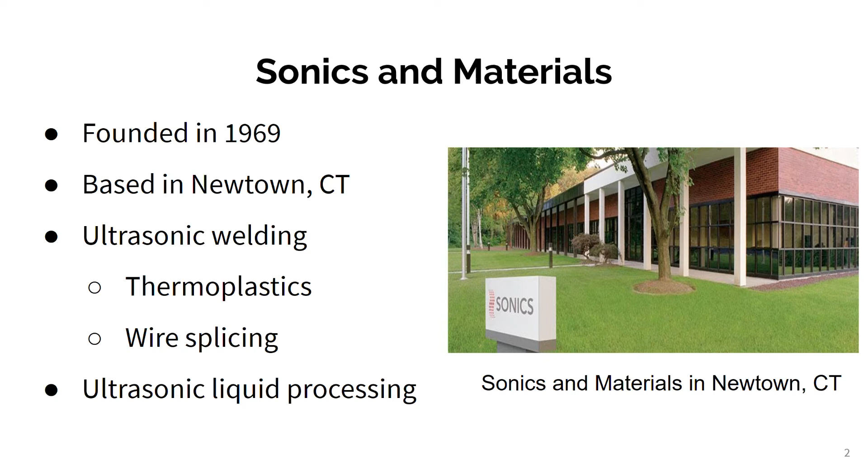And our project's objectives are to simplify the gather tool to improve its cost, manufacturability, and repeatability. So the requirements for this project include manufacturing and validating a working gather tool prototype to use this data to create a final gather tool recommendation. Additionally, we will provide possible anvil tool jamming issue solutions.

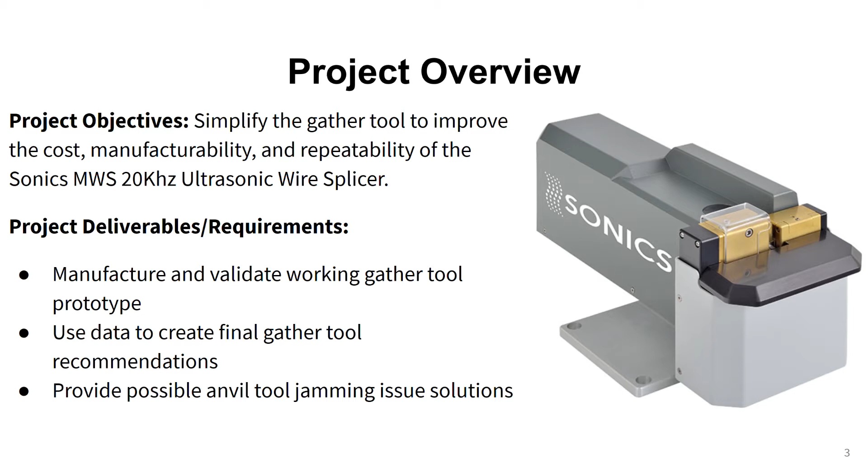There are two critical weld mechanisms for the wire splicer, the gather and anvil tool. The gather tool sets the width of the weld, and our goals are to reduce the machining and assembly costs, develop a working prototype, and integrate that prototype into the splicer for testing. The anvil tool applies a downward force on the wire, and we're hoping to fix the jamming issues caused due to wire debris getting in the gaps in the tool, as well as generate design recommendations and models for these solutions.

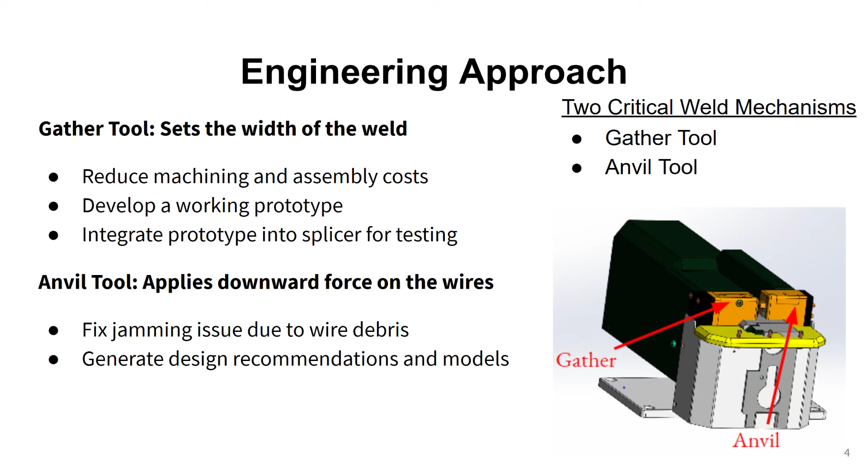The gather tool is required to move the gather block, outlined here, up to 10 millimeters, remain stationary during the welds, and produce high-strength welds. The original gather tool to the left is very complicated with a manufacturing cost of over $3,700. Our simple design to the right just uses a linear actuator and a spring return mechanism, which was 30% cheaper to manufacture.

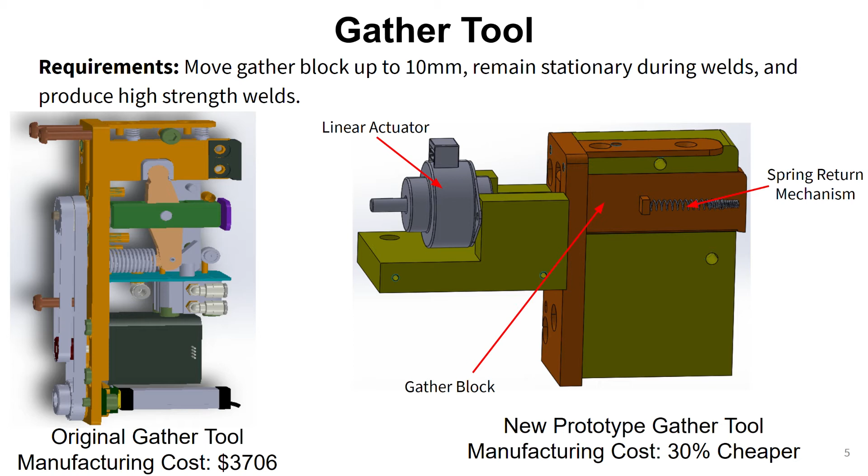The first test that we performed to validate our design was tensile testing. Using 12, 17, and 20 gauge wires, we pulled at 25 millimeters a minute until failure. From this testing, what we found out was that the wires themselves would fail before the welded area. So going forward, we set out to have our design be able to produce welds stronger than the wires themselves, rather than having a set strength metric that we wanted to pursue.

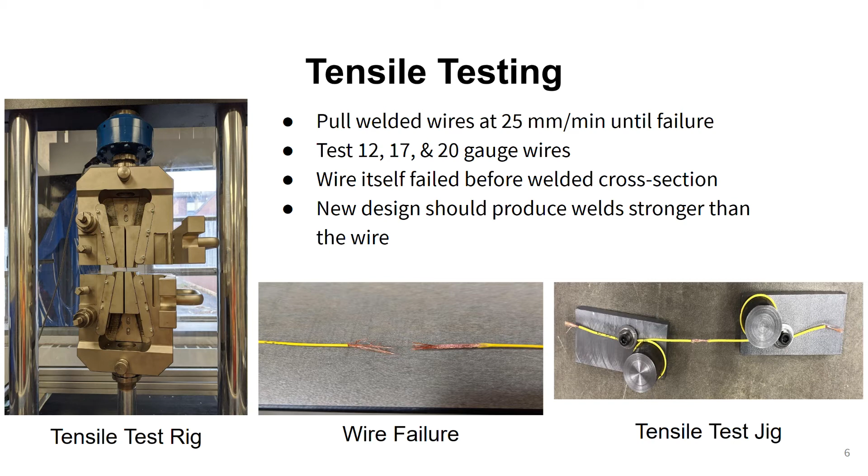The other form of testing that we did was precision testing to make sure that the gather tool design that we came up with was going to be precise. To do this, we extended and retracted the new design by 2 millimeters a second and measured the distance traveled by the linear actuator software and the calipers. The largest deviation that we had was plus or minus 0.7 millimeters with a caliper accuracy of plus or minus 0.2 millimeters.

What we found from this test was that the software defaults to inches, leading to conversion error, but although our test showed that we weren't as precise as we liked, we did find out that we had the accuracy that we want, so with some fine-tuning we could get the results that are needed to have a successful design.

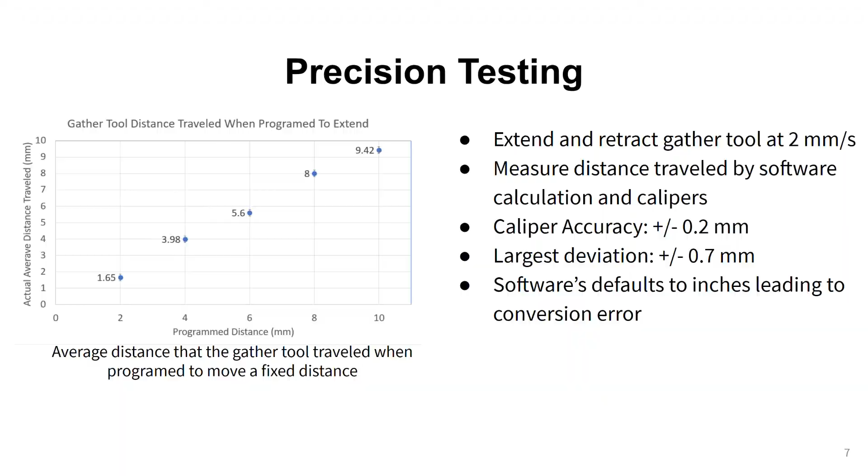Here you can see a video of the integration testing where we took our new design and hooked it up to the existing wire splicer. From this testing, we were able to conclude that our spring return mechanism shown in the previous slides is not actually needed due to the fact that the springs didn't provide any noticeable difference in the retraction speed of the gather tool. By doing this, we're going to be able to reduce the amount of parts in the final assembly. This will in turn reduce the total cost of manufacturing.

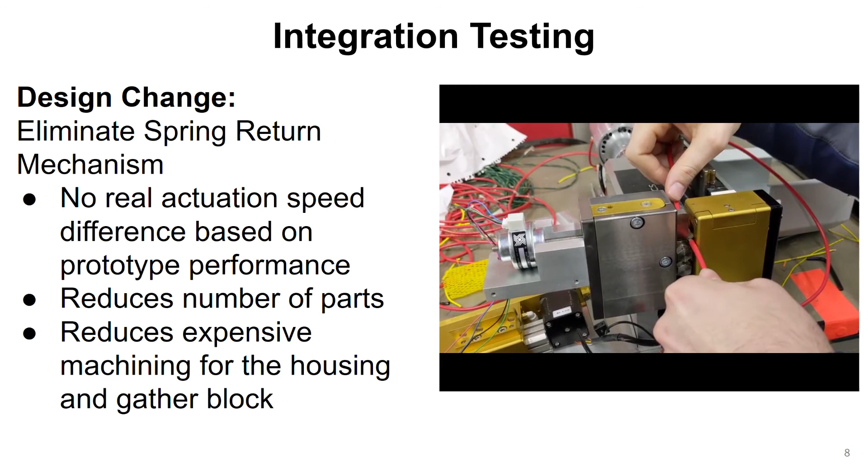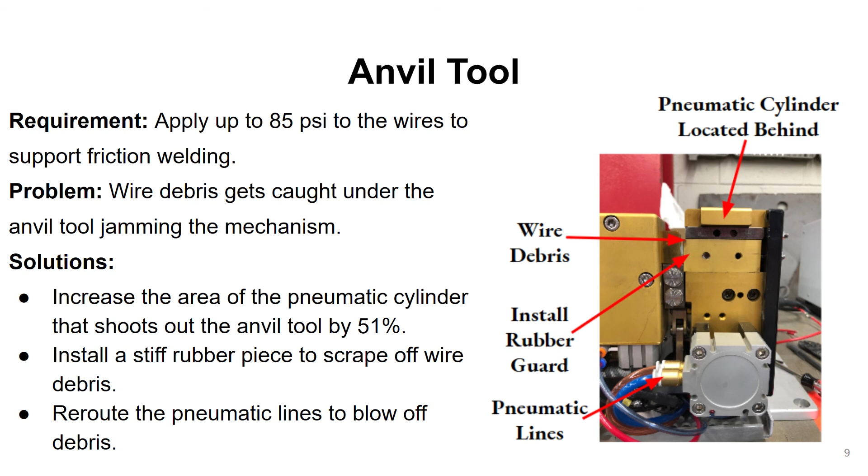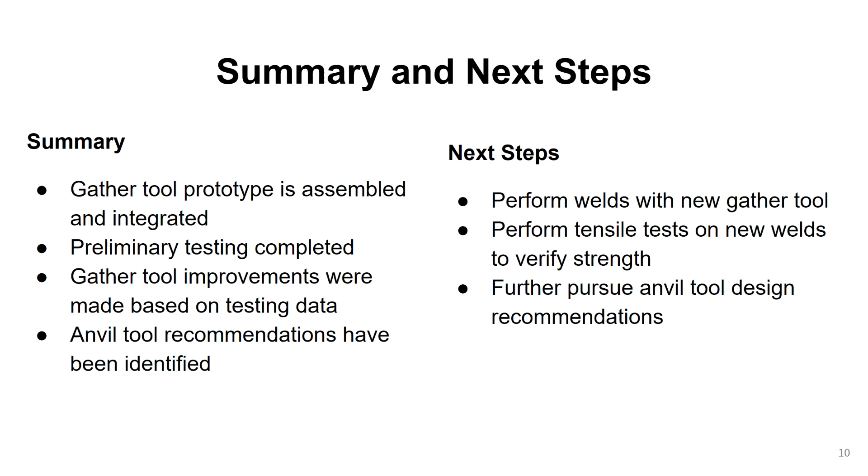The gather tool prototype has been assembled and integrated as well as had preliminary testing done. We've created improvements based on this data as well as generated anvil tool recommendations. Our next steps moving forward are to perform welds with the new gather tool, perform tensile tests on the new welds to verify strength, and further pursue the anvil tool design recommendations. That's where we are currently in this project, which we are very proud of.